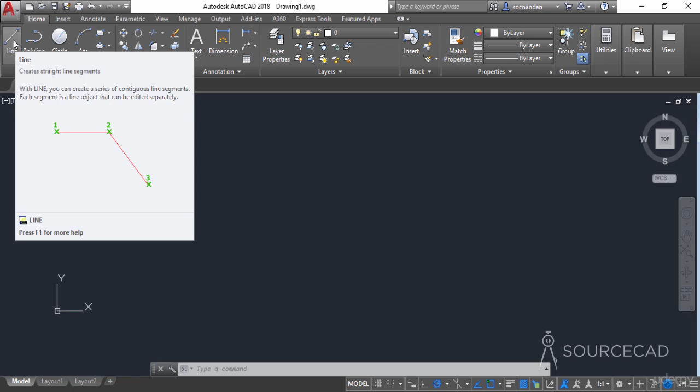So in this case, if you want to start the line command, you simply have to click on this line icon or the line tool. Alternatively, you can also use its command equivalent line or its command shortcut L, and you can simply press enter to start the command. So let's type L and press enter, and here also we have this line command.

Now after starting a command, you'll notice that this command line will show in bold letters the name of the command or the command equivalent of that command, and also the instructions that you can follow to make the geometry. So in the first case, let's make a simple rectangle with a length of 10 units and a width of 5 units using the line command.

So now here it's prompting you to specify the first point. So let's click anywhere in the drawing area to specify the first point. And here we have it. Now make sure that this polar tracking, object snap and object snap tracking is turned on for making this rectangle, and we'll learn about these status bar options later on in this course.

Let's now move our cursor towards right side and enter a length of 10 units and press enter. So now you'll notice that depending upon the current scale of your drawing, the line may be very small just like this, or it may be of very large size. So you need to zoom in and zoom out in order to fit that line in our drawing area. So now here we have it, the line of length 10 units.

Now we need to make another line in the upward direction. So move your cursor in the upward direction and you'll see this green tracking vector. That simply means your line is completely vertical now, and enter the next distance, which is 5, and press enter. Now move it towards left and once again enter a distance of 10 units, press enter, and now you can move downwards and enter a distance of 5 units, and that will close the rectangle.

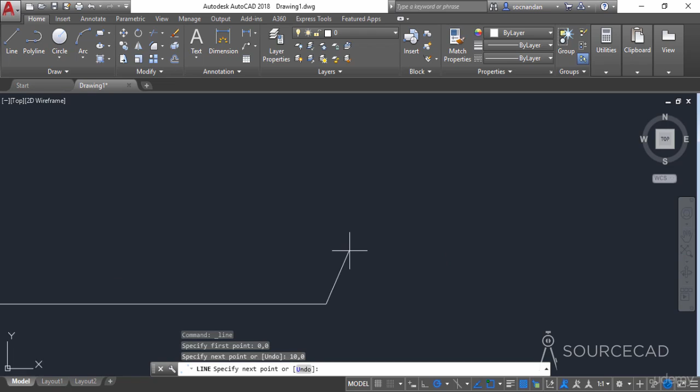So the X value should be 10 and the Y value is 0 because its distance in Y direction is completely 0. So I'll type 10, 0, press enter, and here we have it, the line of length 10 units in this direction. Okay, now we need to make this line in upward direction, and its length should be 5 units.

So its coordinates will be 10, 5, because the value in x-axis is already 10, and we are taking it to a height of 5 units also, so that will also add up. So the total value will be 10, 5 for the coordinates.

Press enter. Okay, now we need to go to this point, and the coordinate for this point will be x0 and y5, because we don't have any value in the x, we only have a height here. So let's type 0, 5, and here we have it. Now we need to return back to the origin, and for that we simply need to type 0, 0 and press enter, and here we have it, the rectangle. Now press enter again to exit this command.

So these are the two different ways of making the rectangle. Now this method, the method of using coordinates, will not work if you use any other point instead of origin as the starting point. So let's do this again, and in this case I'll select the line command once again, and now I'll click somewhere inside this rectangle. And now we need to make a rectangle of length 10 units, so I'll use the same coordinate value, which is 10, 0.

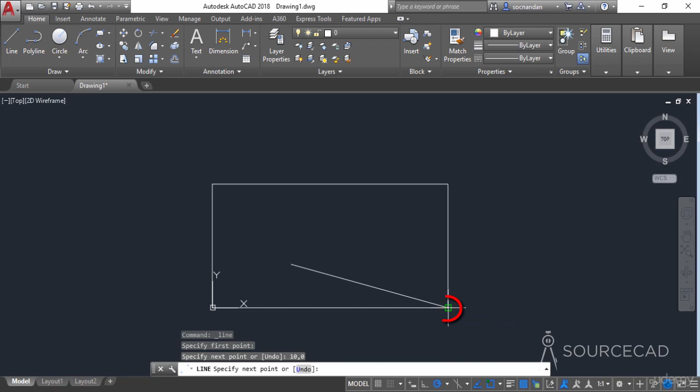And now press enter, and you'll notice that instead of making a horizontal line of length 10, the line is snapping to this endpoint, which is the actual 10, 0 value. So if you're not making any geometry from the origin, and if you're making it from anywhere randomly in the drawing area, then you need to use the relative coordinate system. And it's quite simple. You only need to add an @ sign before the coordinates.

So if you want to make another rectangle, let's say that the rectangle should be somewhere over here. So for that, start the line command, click anywhere, and now just type @10, 0. Now AutoCAD will assume this point, the starting point, as the origin, and now it will make a line of length 10 units. Now if you want to take this cursor upwards, and if you want to make a line in upward direction, you can again type @0, 5, because in this case the origin will shift to this point.

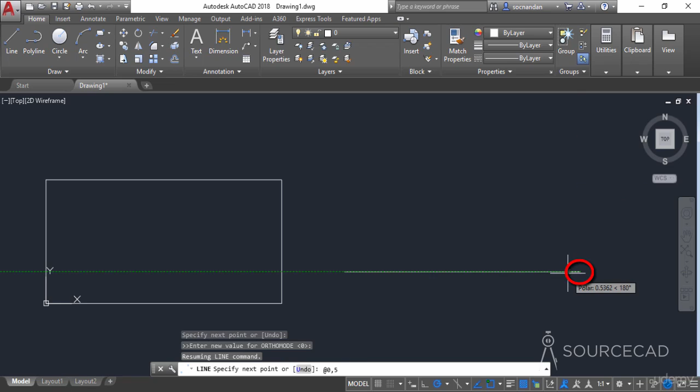So whenever you add an @ sign, the origin will shift to the previous point where you have clicked. So if this is origin and we want to make a line of length 5 units in the upward direction, the coordinate of that point will be 0, 5. So let's press enter, and here we have it.

Now we need to make another line here, and in this case we are moving in the left direction. So again I'll type @ and this time I need to enter -10 because we are making it in the left direction, and the left direction is always negative. And we don't need to add any value in the y-axis, so I'll type y as 0 and now press enter. Here we have it.

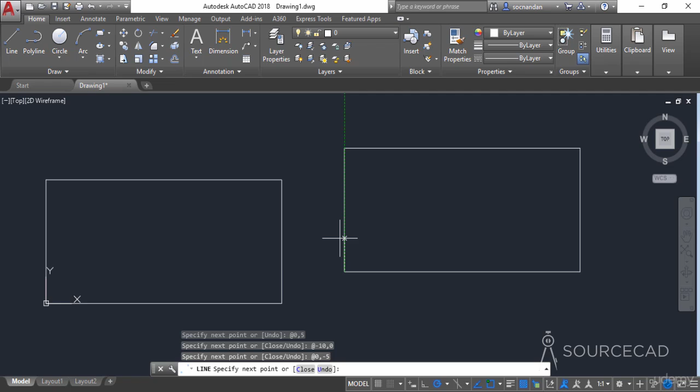Now we need to move to this point, and in this case we need to move downwards in y-axis, and x-axis value is 0. So let's type @0, -5 and press enter to return back to the origin, and press enter again. So this system might be a little bit confusing to you, so don't worry about this. We'll practice this later on in this course, and you can always come back to this lesson after practicing some of the drawings, and then you will be able to use this relative coordinate system quite easily.

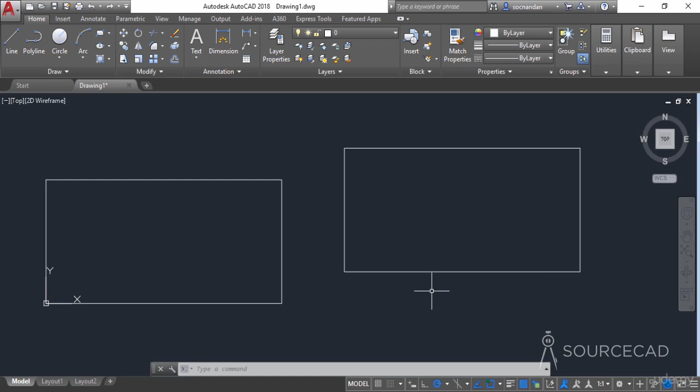So this was an introduction to the line command, and also an introduction to making geometries using the absolute and relative coordinate system. In the next lesson, I will tell you about making the lines or making the geometries using the polar coordinate system.